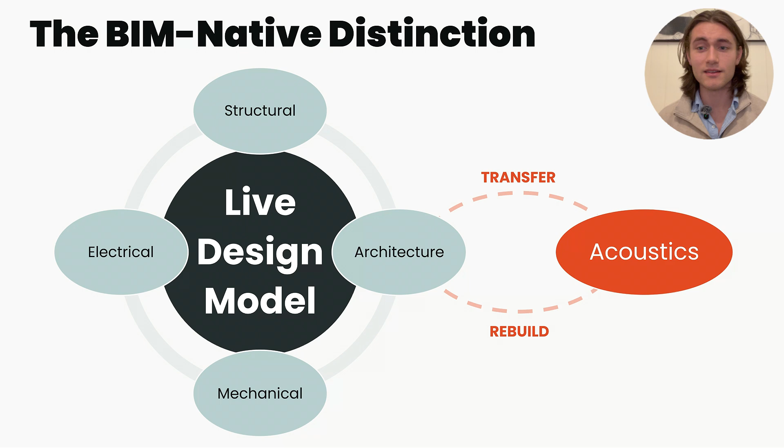The key distinction is where the analysis operates. Acoustics becomes another discipline working from the same structured model information used by the rest of the design team. Rooms, boundaries, constructions, and acoustic properties remain associated with the changing design, rather than being reconstructed from a separate snapshot. The analysis lives where the design lives.

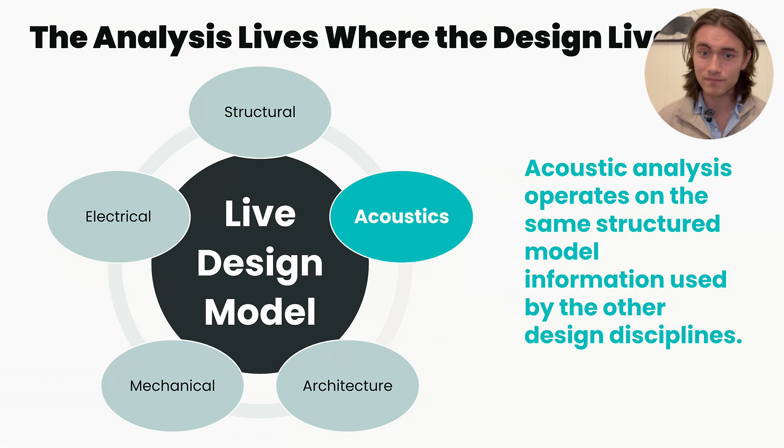At a high level, the framework can be understood as inputs, transformation, and outputs. The inputs come from the building model. Rooms provide the function and geometry. Boundary elements provide their location and construction. Materials provide the surface properties required for room assessment.

The framework then transforms the model information into acoustic meaning. It interprets the relevant spatial relationships, maps room uses to acoustic criteria, and compares those requirements with the design. The outputs communicate what the design requires and where it needs attention. That includes required acoustic ratings, indicative compliance, and identified shortfalls. The framework has been implemented within Autodesk Revit through its application programming interface. That allows it to read project information and communicate the resulting acoustic feedback through the building model itself.

The paper documents the framework using a simplified 14-room office model. That scale made each stage and each figure clear in the printed format. For this presentation, I want to show the same workflow in a larger context. This model contains 3 stories and 92 rooms. At this scale, the information is distributed across a model that is more representative of project scale coordination. I will now move into one floor and follow a single design decision through the analysis.

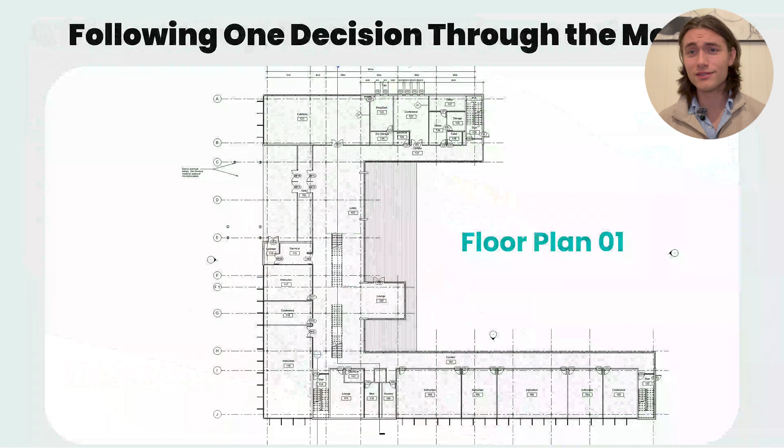Before the analysis is run, the existing Revit model needs an assessment basis and the acoustic information required by the framework. For this assessment, I selected the AAAC Commercial Building Acoustics Guideline, which is commonly applied to commercial fit-outs here in Australia. That provides the room use categories and acoustic criteria. Preparation then involved assigning those categories to the rooms and associating acoustic properties with the constructions and materials.

Reviewable AI-assisted suggestions accelerated part of that work using context already available within the model. Starting from the existing Revit model, that acoustic preparation took approximately 10 minutes for this 92-room example. That is specific to this model, not a universal benchmark, but it illustrates the change in scale. The engineer is not rebuilding 92 rooms and their relationships in a separate analytical model.

With that preparation complete, the first output is the acoustic separation requirement. Once the room use categories have been assigned, the framework examines each adjacency and derives the required acoustic separation. Here, a conference and boardroom adjoins a private office. The guideline uses the source activity of one room and the noise tolerance of the receiving room, so the adjacency is evaluated in both directions.

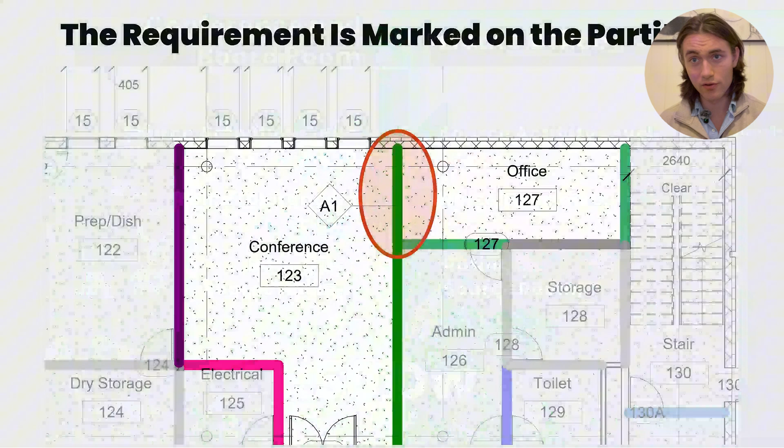With the conference and boardroom as the source, the required weighted level difference, or DW, is 50. In the opposite direction, it's 45. So the higher value governs, and the intervening partition requires a DW of 50. The governing requirement is marked on the intervening partition. The line color communicates the required performance, not yet whether the proposed construction passes or fails.

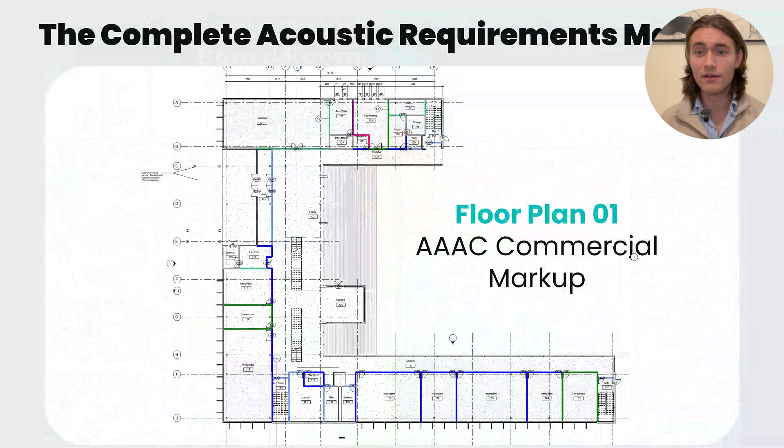And across the model, requirements range from DW30 through to DW60. The complete floor plan can therefore be marked up systematically from the room uses and adjacency relationships, following the same logic as an acoustic report markup.

The assessment is not limited to one acoustic question. The framework can also assess airborne and impact requirements through floors and reverberation time within rooms. These are different outputs, but each begins with the relevant classifications, constructions, and material properties. This is design stage feedback. It does not replace detailed verification or professional judgment. Its value is that it identifies where an acoustic question requires a design response.

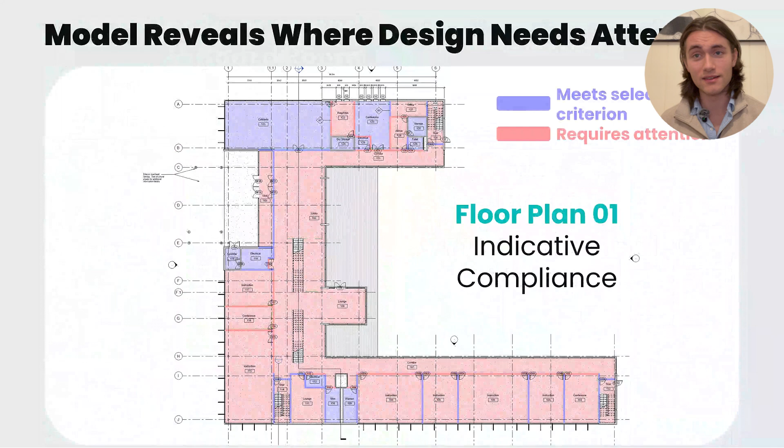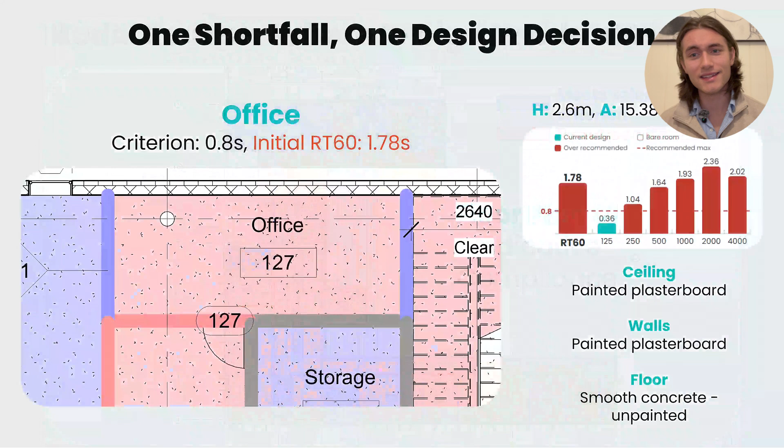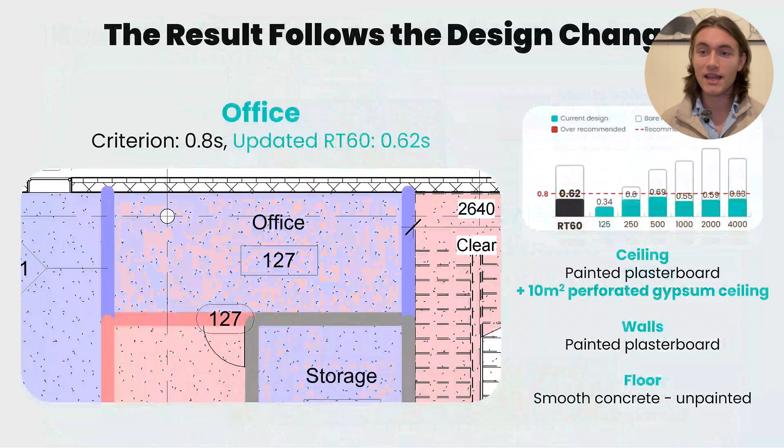In the paper, the framework results were consistent with those produced through conventional hand and spreadsheet-based calculation workflows. That supports the analytical consistency of the approach. However, these outputs remain indicative, design stage feedback rather than final verified compliance. The important change is not simply the speed of the calculation, it is the timing of the feedback. So far, I have shown a standards-based workflow from requirement to design change.

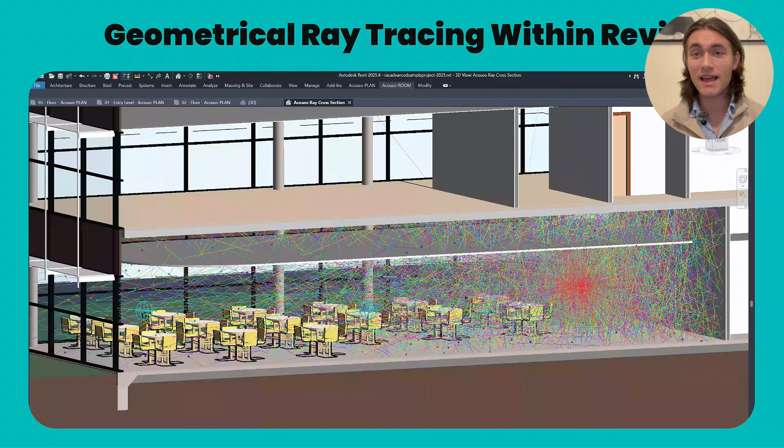Beyond this paper, ongoing research is extending the framework into geometrical room acoustics. This is geometrical acoustic ray tracing performed and visualized within Revit. The developing implementation uses these ray paths to support room acoustic calculations. The model geometry and its assigned acoustic properties become the analytical inputs without exporting and reconstructing the room in a separate analysis environment. The work is ongoing, but it demonstrates how the BIM native framework can extend beyond standards-based assessment into room acoustic analysis.

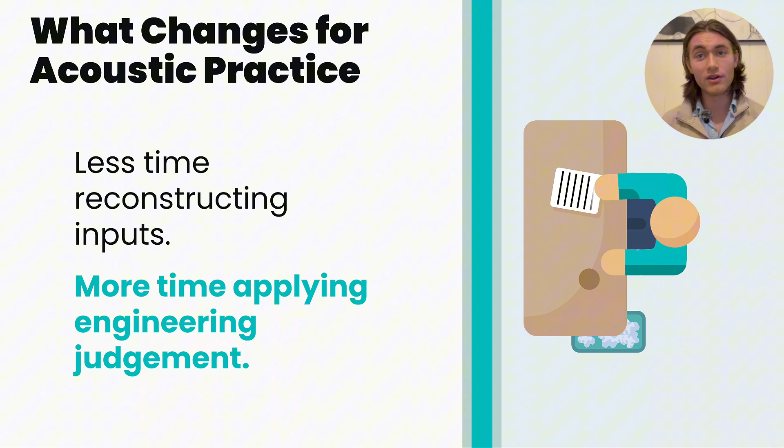So what does this change about acoustic practice? Primarily, it changes where the engineer spends their time, but it does not remove the acoustic engineer. A meaningful share of the conventional assessment is identifying rooms, mapping relationships, and preparing information before the specialist judgment begins. Reducing that repetition creates more time for the work that actually requires expertise. That means interpreting the result, understanding when a minimum requirement should be exceeded, selecting a solution that works with the architecture, services, cost and program, and recognizing where an indicative result is not enough. The role does not shrink, it sharpens.

There is also a broader consequence. When the setup cost is lower and the feedback is available earlier, acoustic considerations can enter more projects and more design conversations, including those where specialist input might otherwise arrive only at a late milestone. The productivity benefits matter, but the larger opportunity is to move acoustic judgment closer to the moment when the project team can still act on it.

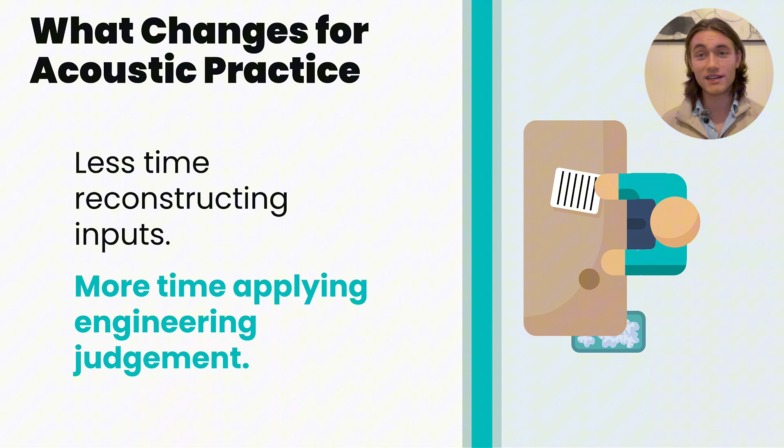So to return to the private office and conference and boardroom example, we already know how to establish the acoustic requirement. We know how to assess the construction, and we know how to improve the room response. The limitation is that the knowledge is too often applied after those decisions have already been made. This presentation has shown an implemented framework applied to a project scale model and used to complete an acoustic design iteration. Whether we are assessing compliance or visualizing how sound may travel through a space, the opportunity is to make acoustic knowledge available while the rooms, partitions, and finishes can still change. The timing of acoustic input determines what it can achieve.